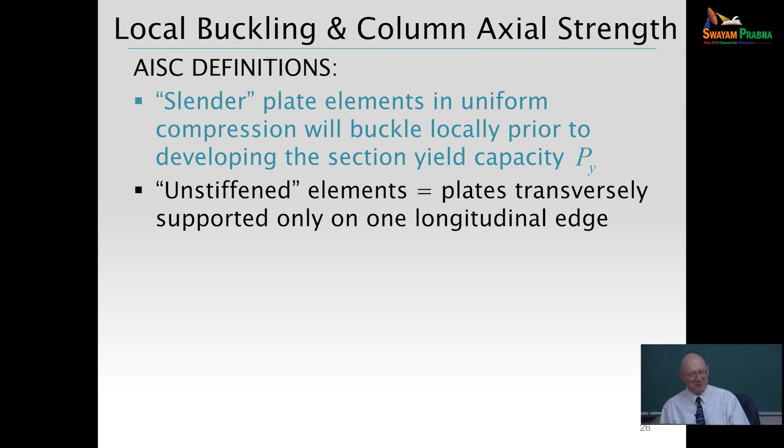Okay, and stiffened, that's where I was going there all along. That would be like your web in an I-section. Both edges of the web are prevented from lateral plate bending movement by the flanges, or restrained from lateral plate bending movement. So we have slender plates, unstiffened plate elements, and stiffened plate elements. That's AISC's definitions.

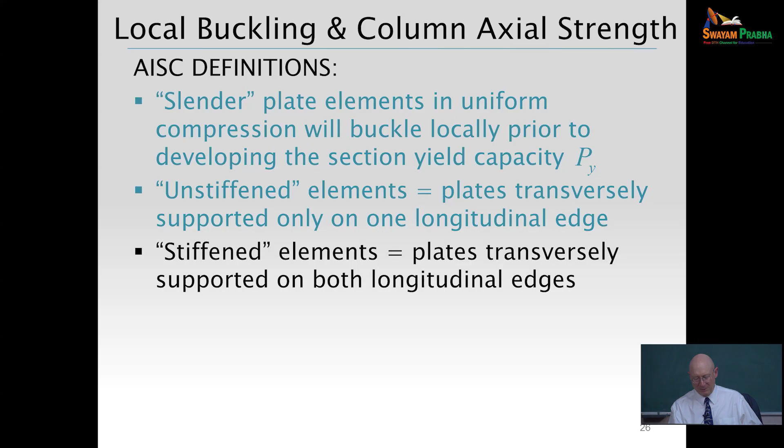So then there's tables in AISC, and basically, how do we define where we are? We look at width to thickness ratios and compare those to limits. This table shows some of those limits, and I'm going to zero in on cases 1 and 2 here in the next few slides. So this is looking at the case with flanges, and when are flanges slender or non-slender. Slender means it's susceptible to local buckling before we can get to the yield load, and non-slender meaning we don't need to worry about any local buckling even before getting up to the full yield of the cross section.

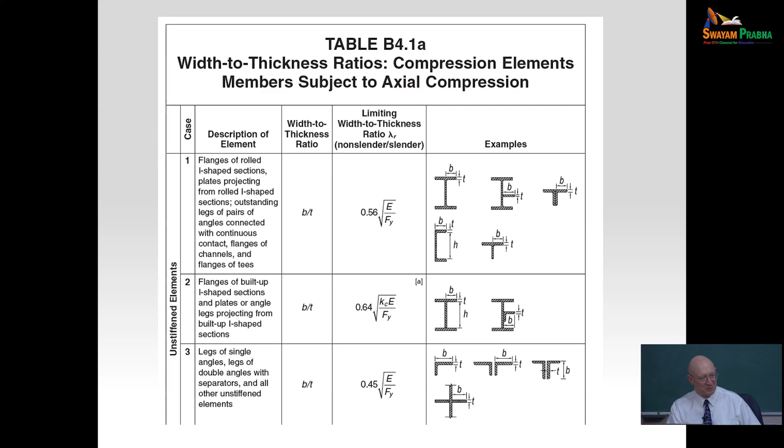So here's case 1. It corresponds to a rolled I-section flange, and the limit is written in AISC as 0.56 times the square root of E over Fy. I think in the Indian Standard it has an epsilon term like the Eurocode, so we don't have the epsilon—we normalize everything directly to a square root of E over Fy when we're writing these limits. If you look at grade 50 steel, or 345 megapascals, that works out to 13.4 for the width—we call it B over T generically, but for the flange, that's half of the width divided by the thickness of the flange that we're using for the width to thickness ratio.

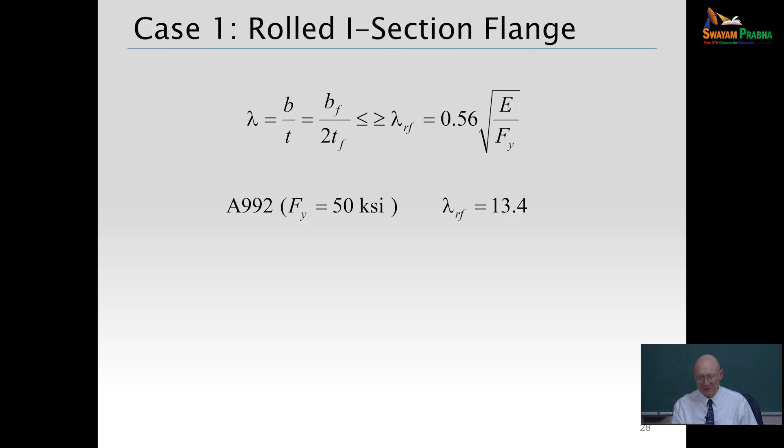Now, it turns out there are no rolled sections with flanges in grade 50 steel, grade 345, that would basically classify as a slender flange in uniform axial compression. I think that's there in case we move to higher yield strength, and so we may get that, but you have to have a pretty darn high yield strength before that would kick in. Now webs are a different matter—oh wait, I keep wanting to go to webs before I finish talking about flanges.

So if it's a 3-plate welded I section, then we use a different equation because there the web thickness can vary quite significantly depending on the application. There's a term referred to in the American Standard as K subscript C, which we calculate as 4 divided by square root of H over TW. But...

if that becomes less than 0.35 when H over TW is greater than 131, we limit the minimum calculated value to 0.35, and we don't allow use of a value larger than 0.76. It has to be a very thick web to get to that.

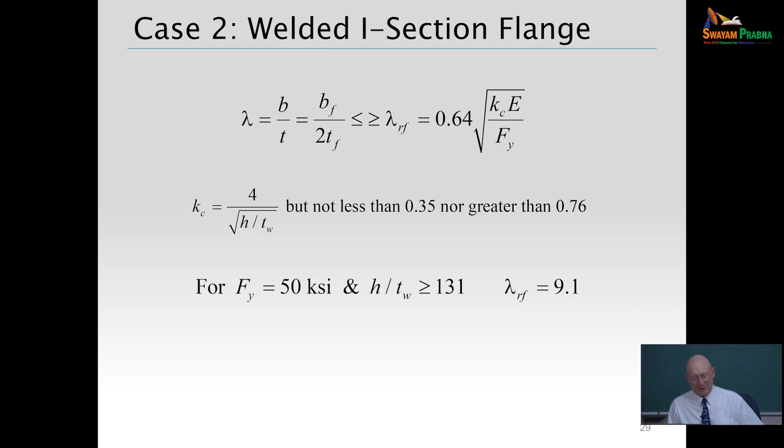So if we have Fy is 345 megapascals, and a very thin web where H over TW is greater than or equal to 131, this limit is 9.1. That can trip up a lot of flanges you might want to use in terms of design.

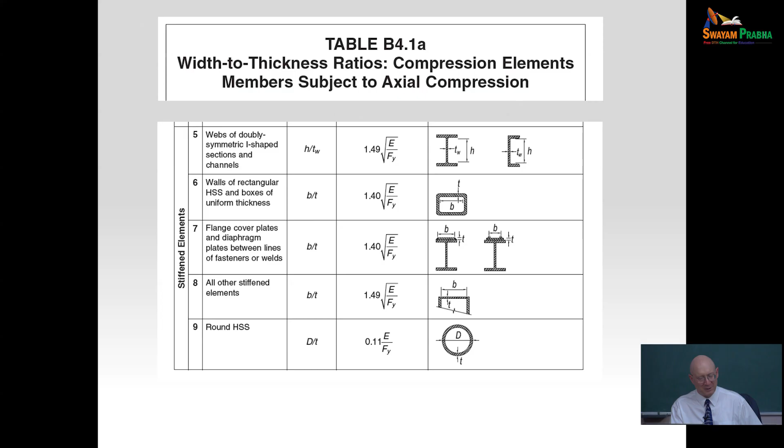Okay, so we finally get to the web, the stiffened elements I keep thinking of wanting to talk about. This is the table that shows graphics with the equations for the different width to thickness ratios we check here. If we're looking at I-section webs, these are 2 cases, cases 5 and 8, either for rolled or welded.

B over T is H over TW here. If it's a rolled section, we take H as the distance between the insides of the flange fillets. If it's a welded section, we just go inside to inside of the flanges to calculate H. And we compare that to 1.49 square root E over Fy. So again, if Fy is 345 megapascals, that's 35.9.

So there, one way to classify I sections is column type I sections versus beam type I sections. Column type I sections would tend to have a flange width very similar to the depth of the section, and most of those would often have a B over T or an H over TW less than 35.9.

But if we get more into beam type sections, those are sections intended more for flexure, so they're relatively deep compared to the width of the flanges, and you can get rolled wide flange sections with depth to width of flanges in the order of about 3.

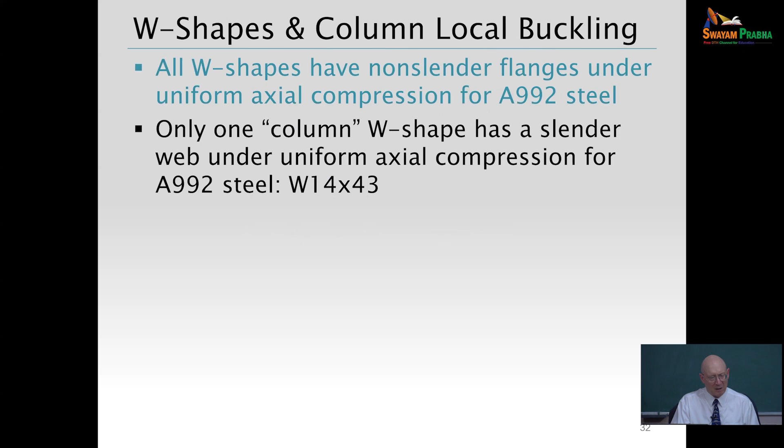As I said a second ago, all wide flange shapes have non-slender flanges - the ASTM wide flange shapes under uniform axial compression for A992 grade 345 steel. Only one column type wide flange shape has a slender web under uniform axial compression - in imperial terms, that's a W14 by 43. But again, a very large number of the beam type wide flange sections would have slender webs in uniform axial compression.

I keep saying slender webs in uniform axial compression because when we go to flexure, it's a different thing. We talk about compact, non-compact, and slender elements under flexural compression. So it's a different beast when we get to that.

With plate local buckling strength, it's useful to understand theoretically when a flat plate subjected to uniform compression would buckle. That's an interesting academic exercise - if we tried to write provisions working from the stress state in the plate, considering it's a combination of flexure and axial compression, what do we get? You can take the Eurocode provisions, which you probably know, and try to do that exercise to get strengths, but it becomes a very good academic exercise, I would say.

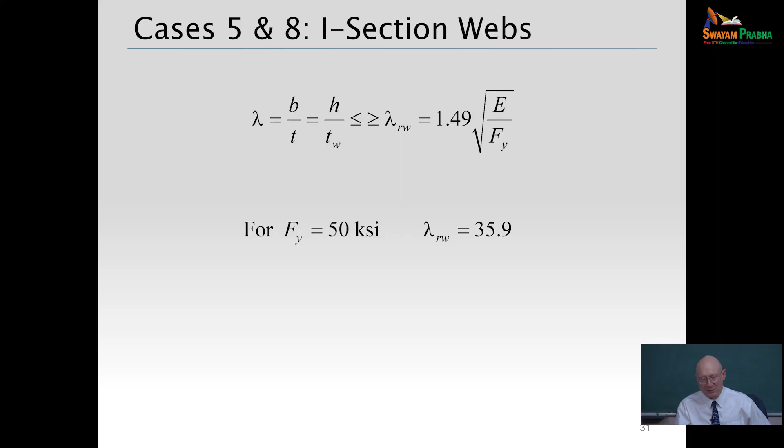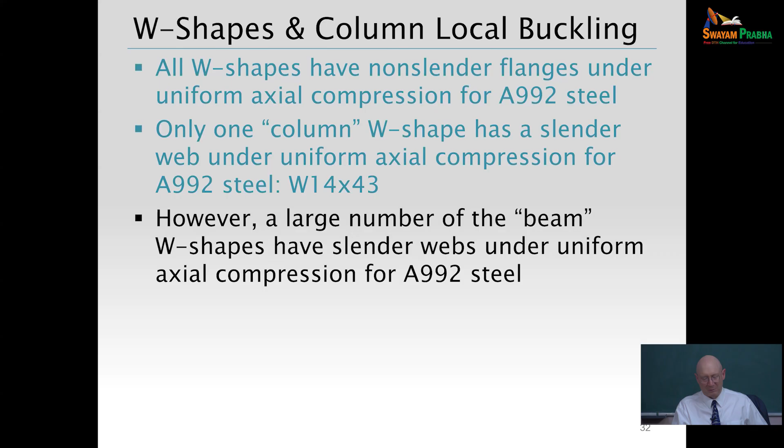So these are compactness limits here on the webs. Again, as I was saying, for wide flange shapes, there's nothing that's slender for uniform axial compression. There's one column type shape that's slender, but then a lot of beam type shapes that would classify as slender when we're looking to calculate our strength here.

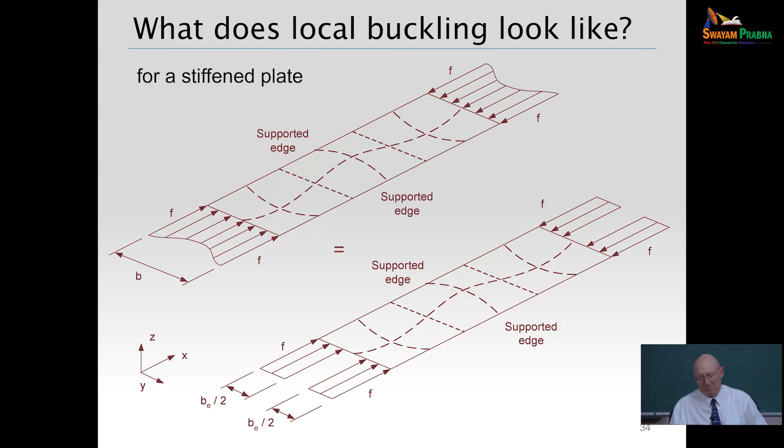So what do we do? We basically say, okay, we're going to discount the effectiveness of the plate out in the middle, so we've got a total effective width that has two halves here. If you take little f and say, if it's just a plate, not in a column, take f equals fy. So my strength of the plate would be when I develop fy at the edges, but I'm going to lose some effectiveness of the plate for its strength out in the middle. So that's basically what plate local buckling looks like, and that's how we're quantifying things with effective widths.

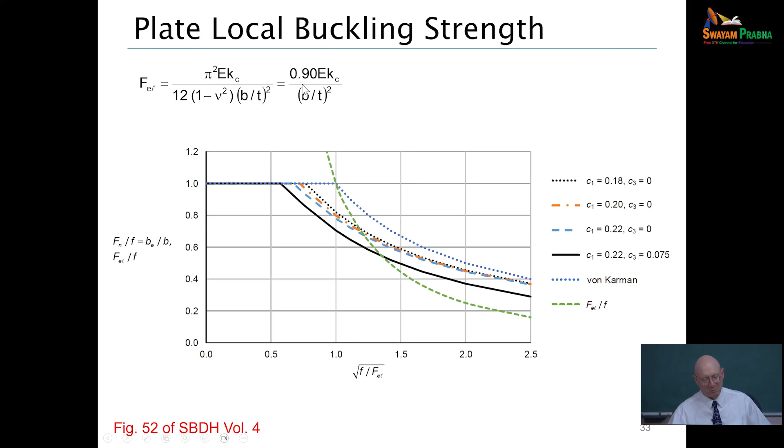Also, it's useful to understand buckling coefficients for plate local buckling. This is a plot from the Steel Bridge Design Handbook, with credits to a steel design textbook in the U.S., Salmon and Johnson. We can write the plate local buckling coefficient or equation as 0.9E times Kc divided by B over T squared, which is what we get if I come back here. This is the equation we usually write from theory of elasticity, but if we plug in 0.3 for Poisson's ratio and do pi squared over 12 times 1 minus Poisson's ratio squared, we get essentially 0.9. So now this form, depending on different boundary conditions, gives different values for the local buckling coefficient, Kc.

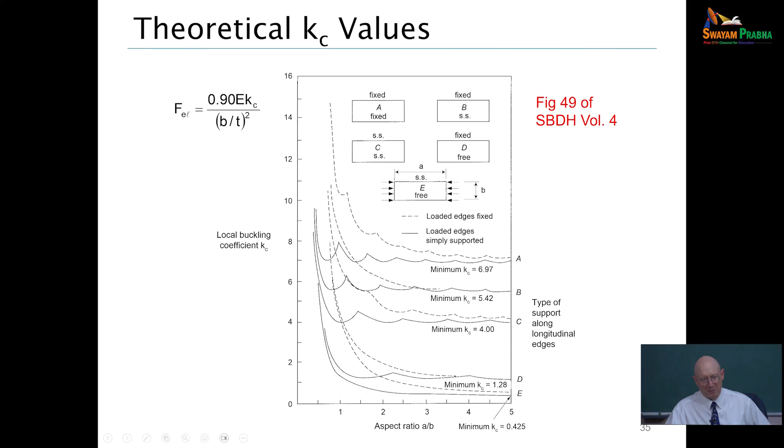So if you have full rotational restraint on both longitudinal edges, that's case A. If it's fixed, simply supported, it's case B. If it's simply supported on both edges, case C. That's a very common approximation. Case C is 4. If it's fixed-free, it's 1.28. And if it's simply supported and free, it's 0.425. We play various games with that for flanges of I-sections in terms of what our Kc is there, based on how much restraint we get from the web. For a very thin web, we actually count on a Kc of 0.35 — I showed that to you earlier — which basically means the web is going to destabilize the flange in that case.

All right, so what I'd like to do is wrap up today with a discussion of things that actually came from Dr. Teoman Peköz at Cornell, and Dr. Kalyanaraman, who was very involved with much of this work during his research — the unified plate effective width approach.

This is an approach where we use effective widths for all elements of the cross section. In some codes, we still use what are referred to as form factors to account for local buckling. Well, the AISC code has moved entirely away from that, to using effective widths for everything. If there's a slender cross-section plate element, we calculate an effective width. So the way the unified effective width approach works for a column is we do the column calculation to get an F critical — or I need to update my notation here, the AISC specification now calls that Fn. So that's your strength of the plate. We're trying to move in the direction where subscript CR always means elastic. We're not there yet.

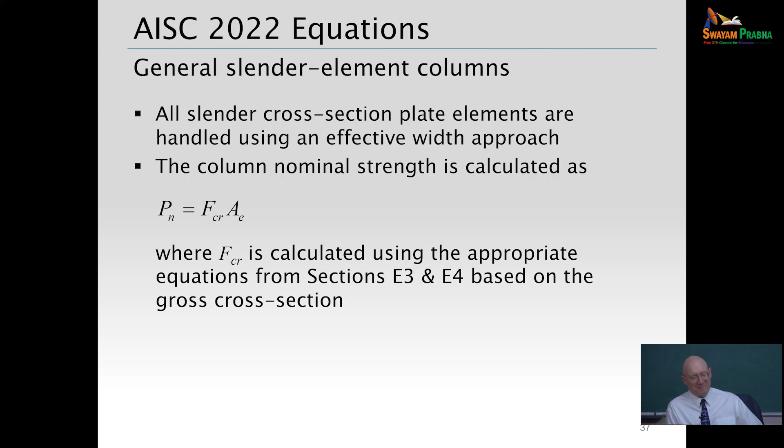You do that calculation of Fn, or F critical, using your column strength formulas with gross area. Once you have that, you also need to determine the effective widths for your plates. You get your effective area by summing effective widths times thicknesses, and multiplying by Fn gives you your column resistance, your nominal resistance.

So just to show the equations, in AISC they look like this. The middle equation is what throughout the world we call Winter's equation, at least when we use a C1 of 0.22. But we play games with that to gain extra benefit in some cases. For square and rectangular hollow structural sections, we use a C1 of 0.2, and for any other stiffened element, 0.18.

The other equations here give us an elastic local buckling stress. I have some handouts that explain where all this comes from. It's a way of writing the elastic buckling stress in terms of the non-slender plate limit, lambda r.

We have limits here for when we take the effective width equal to the full width, which happens when this equation is satisfied. So what's going on is, if you have a long column, your Fn or F critical is going to be relatively small. We feed that into this equation, so the logic is: my column fails at a very low stress, and I use that stress to check whether I have a local buckling issue. I get my effective widths based on that, then multiply by Fn to get my column strength.

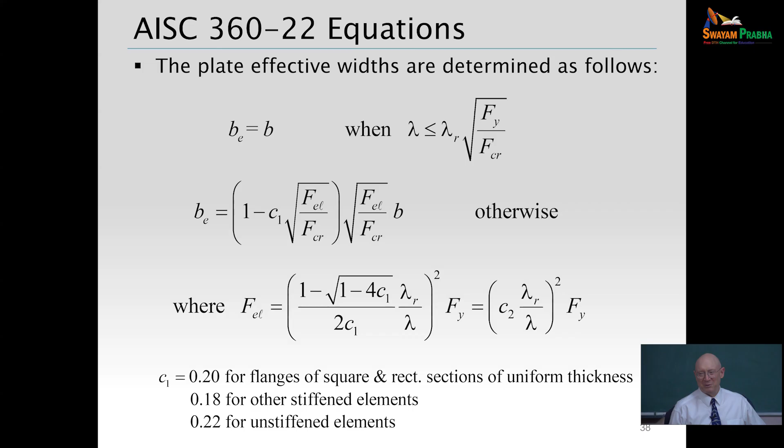Rather than get lost in those equations, it's good to do an example to understand how they work. Again, my apologies, I didn't convert these from imperial units to SI. It's a W24 by 55, so 24 inches nominally deep, 55 pounds per foot in weight, A992 steel, so Fy would be 345 megapascals.

We have a flange slenderness, B over T or BF over 2TF, at 6.94 for this section. Comparing that to lambda RF, 0.56 square root of E over Fy, which is 13.4, it's less than that, so it's a non-slender flange—we don't have to worry about local buckling there. But we really don't need to do that check at all, because I already told you no rolled wide flange sections for grade 50 steel have slender flanges. We're just demonstrating it here.

For the web, the case can be very different, and the W24 by 55 is really more of a beam section. Its H over TW is 54.6, and the non-slender web limit, 1.49 square root of E over Fy, is 35.9. So we've got to deal with potential local buckling here.

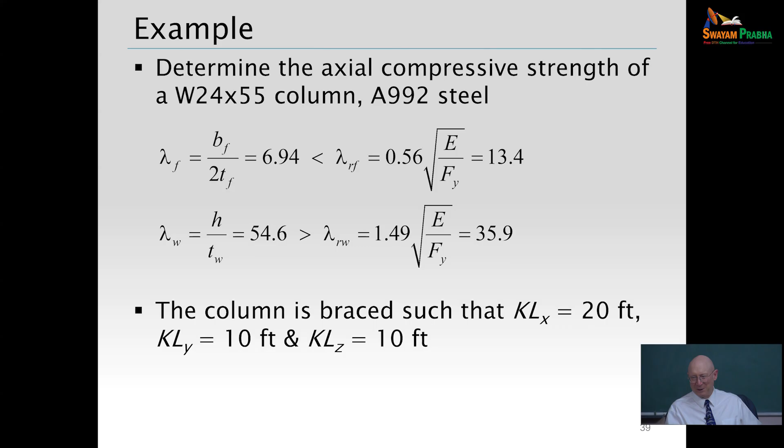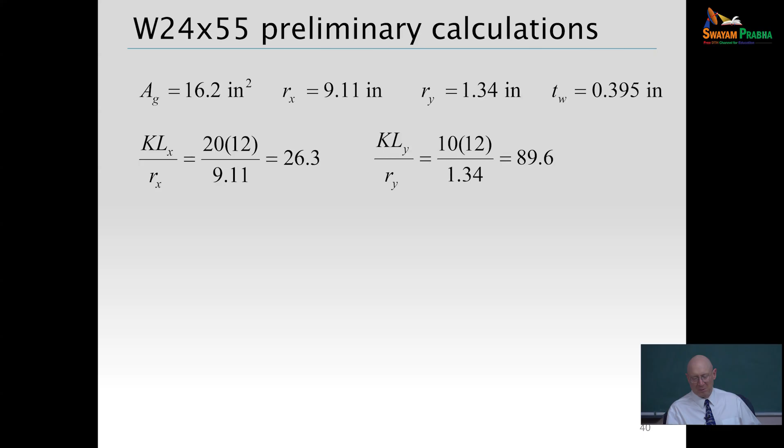So we need a few properties. If I grab properties from the manual tables for this section and calculate KL over R for major axis flexural buckling, that's 26.3. For minor axis flexural buckling, it's 89.6. So clearly the minor axis buckling is more critical—it gives us a smaller elastic buckling stress and a smaller column strength. No need to check torsional buckling here since KLZ equals KLY.

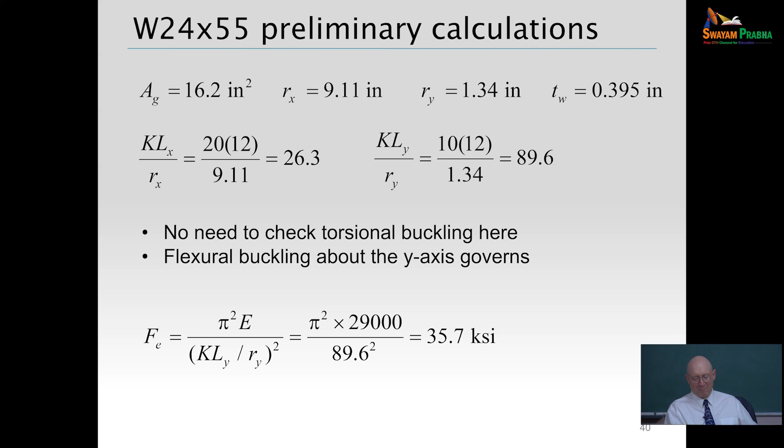We can see flexural buckling governs about the Y axis. So we'll calculate our FE using the Euler equation, pi squared E divided by KLY over RY squared. We got 35.7 KSI.

Now we take the ratio of FY to FE, take the square root of that, and we've got a lambda. That's 50 to 35.7, giving 1.4. So that falls within the range of the AISC inelastic part of the buckling curve for the column.

So the exponential equation on the second line here is the AISC column buckling stress formula. Again, I need to update my slides. In the current AISC standard, we call this FN now instead of F critical.

So this is 27.8. For the flanges, they are non-slender, so we can use their full width. However, we need to check to see whether we need to take any reduction due to local buckling in the web.

Now again, if we're designing by Eurocode, we're going to take a reduction. We're going to get a cross-section strength based on Fy, and that slender web is going to give us a reduction.

In the unified effective width approach, the logic is: but wait a minute, if this column is long enough, my stress is very low at the end of the column, and I'm not getting any local buckling action. So this check here, the inequality, is basically checking for that.

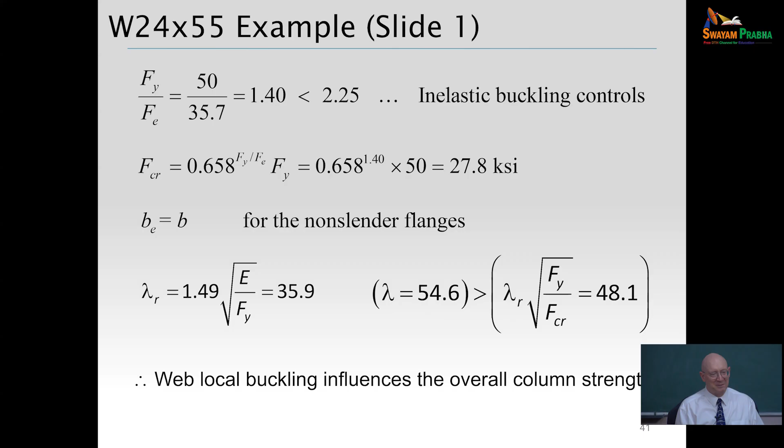It is greater. So it means that, yes, we are going to have to calculate an effective width of the web here to do our capacity. If that came out less, I'd say my web is fully effective, then my column strength is Fn times Ag.

All right, so now, since I need to deal with an effective width, in the AISC provisions, we use this equation that's provided for the elastic local buckling stress. It's just a fancy way to write the theoretical elastic local buckling stress as a function of lambda R. So we got 37.1 for the elastic buckling stress, theoretical elastic buckling stress.

The H is lambda times TW. Now in the American design property tables, the property tables give you the lambda for the web, 54.6. They don't actually give you the H of the web. The H is between the insides of the fillets. And so if you want H, you have to basically multiply lambda by TW.

That's 21.6 here. And now we're finally ready to substitute into the AISC version of Winter's formula for a web of an I section. So C1 equals 0.18 rather than 0.22.

And we have a ratio of FEL to FN, that from the column, which we calculated on the previous slide, is 27.8. So the effective width of the web is 19.8.

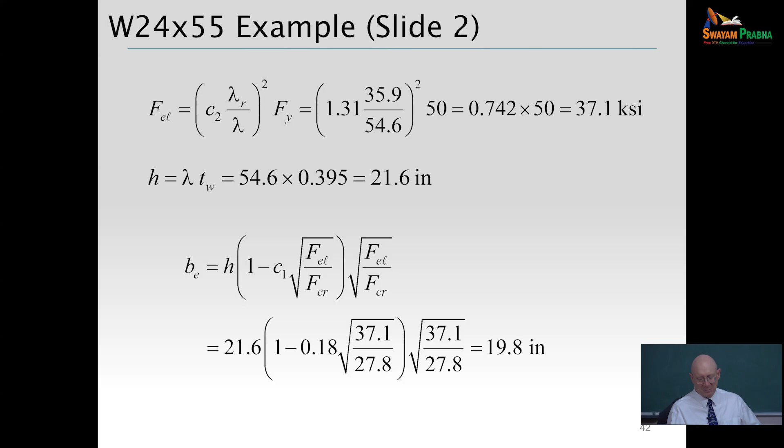So now we could do a width times thickness on all the elements and add them up, but if we do that for a rolled section, we just left out the web flange fillet areas. So we like to try to keep those because they're measurable.

And so the way to do that is that we have the property tables that give us the gross area, and so we're going to determine what area do we need to take out because of the loss of effective width. That's H minus B sub E times TW. So we take that area out to get an effective area.

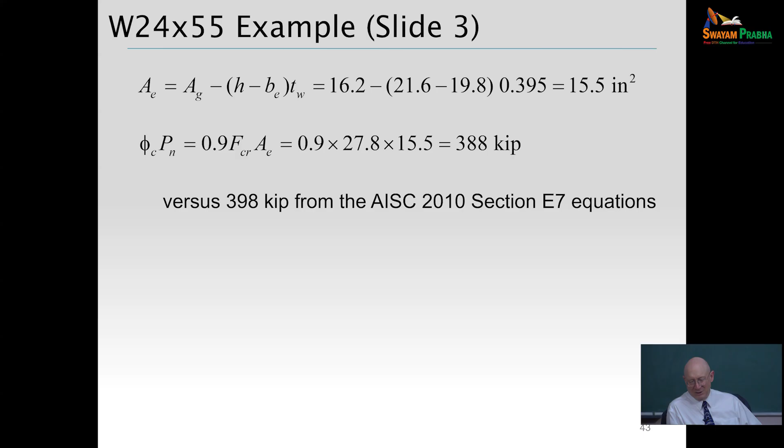And once we have that effective area, we multiply by Fcr, hit it with our phi factor of 0.9, and we get 388 kips. If we were to go back to the 2010 standard, when they had different form factors, it was 398. So here we can say, well, what's 10 kips among friends? We're good.